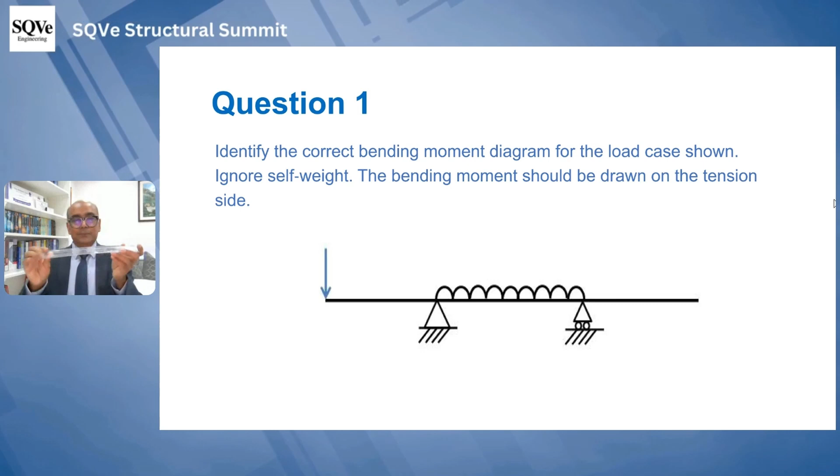I'd like to share a few quick examples on how to draw a bending moment diagram. In this question, we have to identify the bending moment diagram for this load case. Note that loading values are not given. When we draw the bending moment diagram, bending is shown on the tension side. By tension side, we mean that when it bends like this, tension is drawn here. In the UK, and I think in India too, we draw it like this. In North America, they draw a sagging bending moment like this.

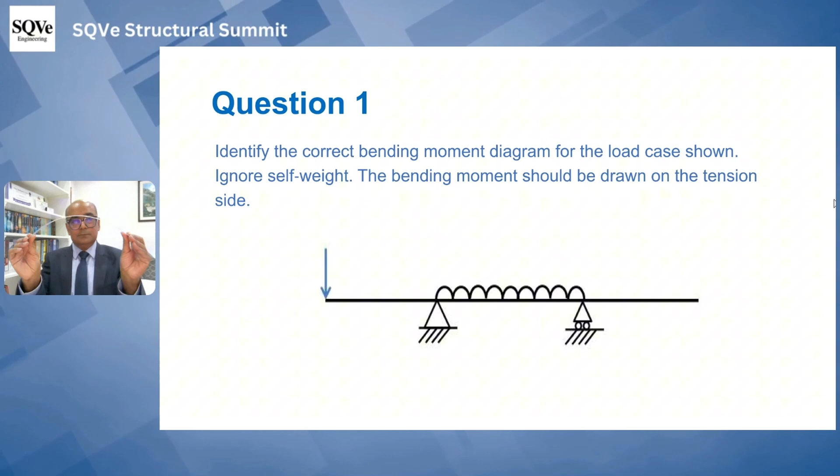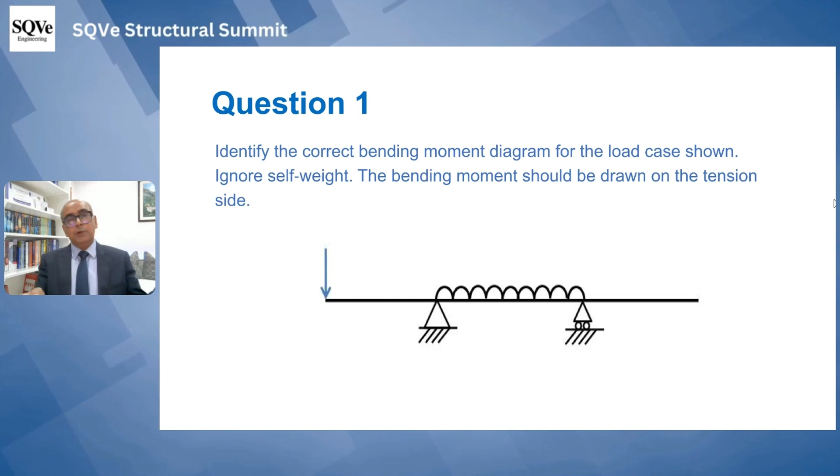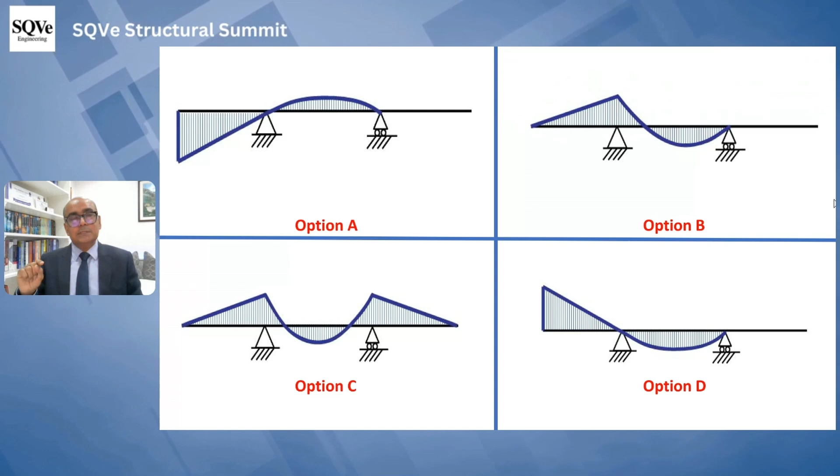Take a screenshot of this question, and I'll give you some options. See that the UDL is applied in the middle, and we have a point load at the end. It's a simply supported beam but with an overhang. There are 4 options to choose from: option A, you can see we have bending at the end, then option B, option C, and option D. What option do you think is correct? It's a very simple question.

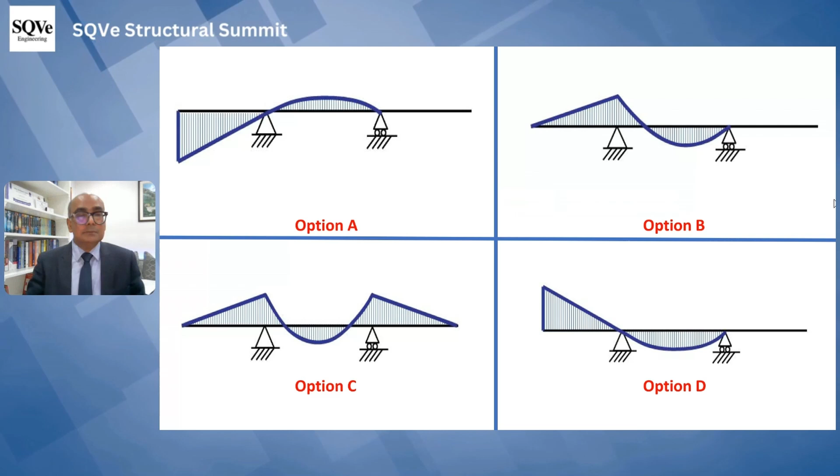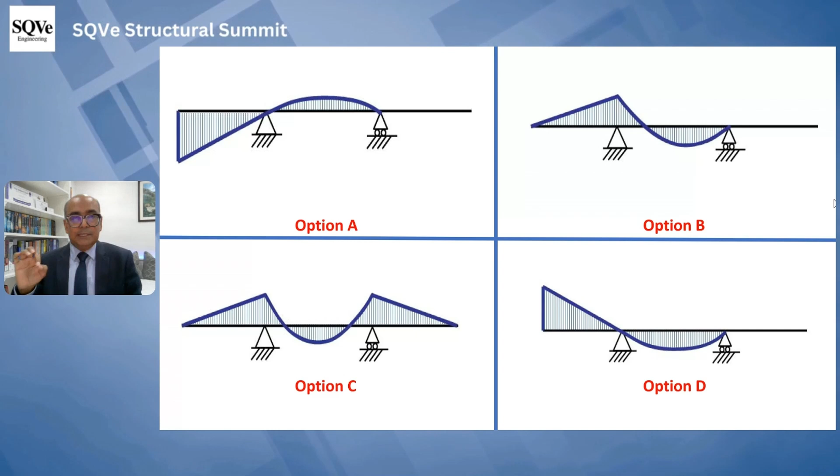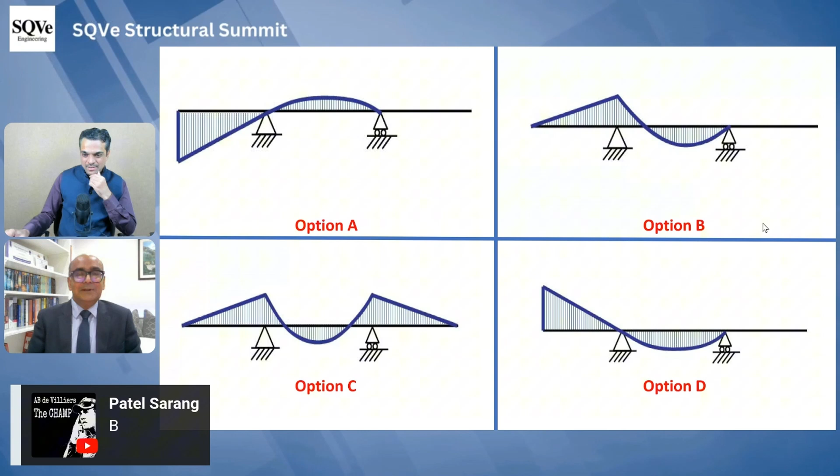I'll tell you a 3-step process to work out the bending moment diagram. So think about it, use your intuition, and tell me which option is correct: A, B, C, or D. We've started getting responses. The answer given is B by a number of participants. Excellent, it's a very simple one.

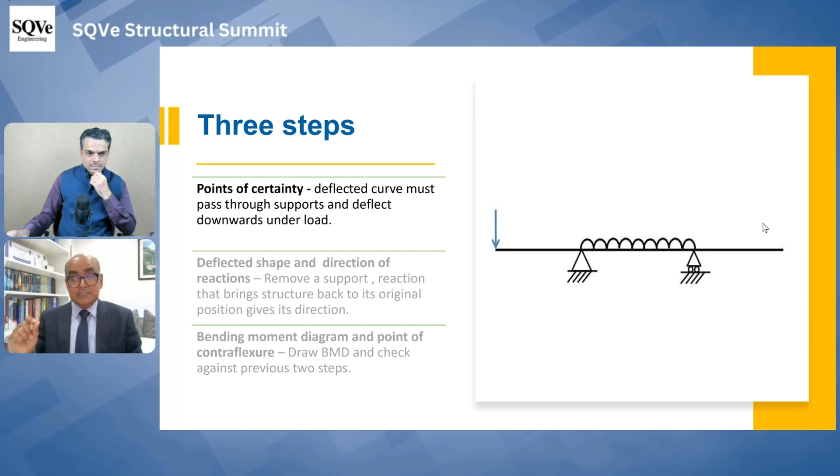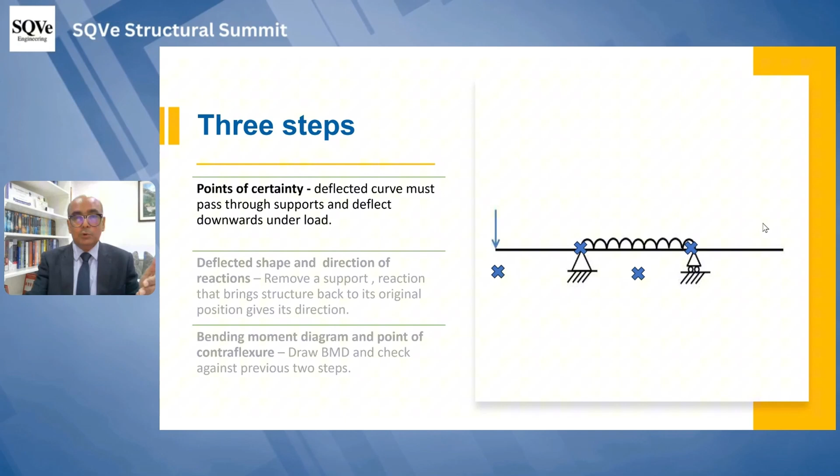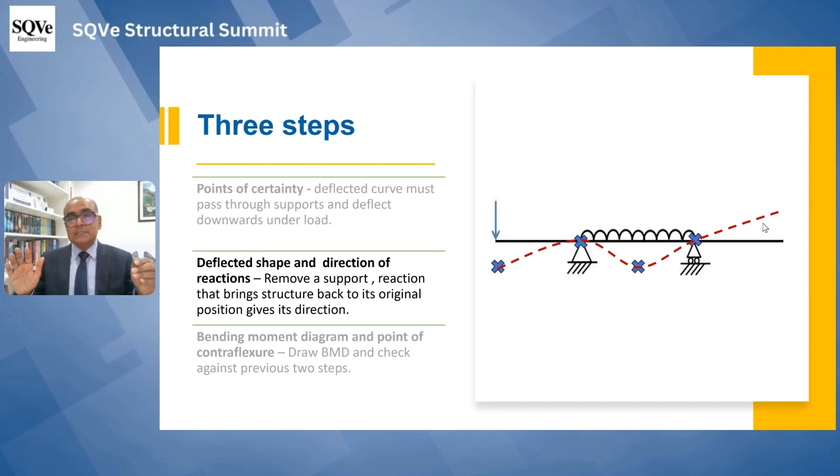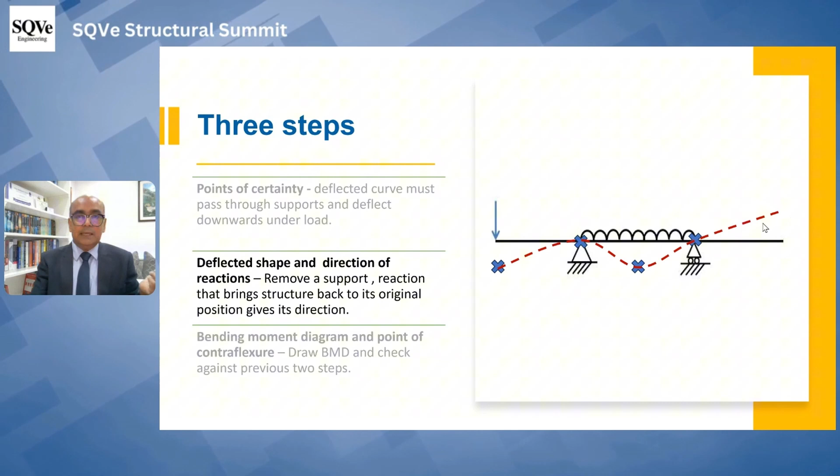Let's go through the process. First, we identify points of certainty to draw the deflected shape—points where the deflected shape will certainly pass through. Then in the second step, we draw the deflected shape passing through these points. At the right end we have a roller, so nothing is happening there, so moment should not be there. At the left side, we will certainly have moment. This deflected shape tells us a really important thing: it tells us the direction of reactions. Both reactions are upwards.

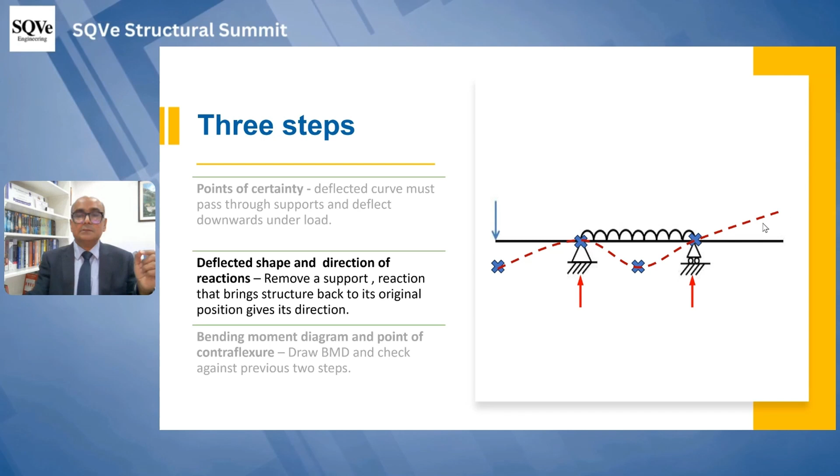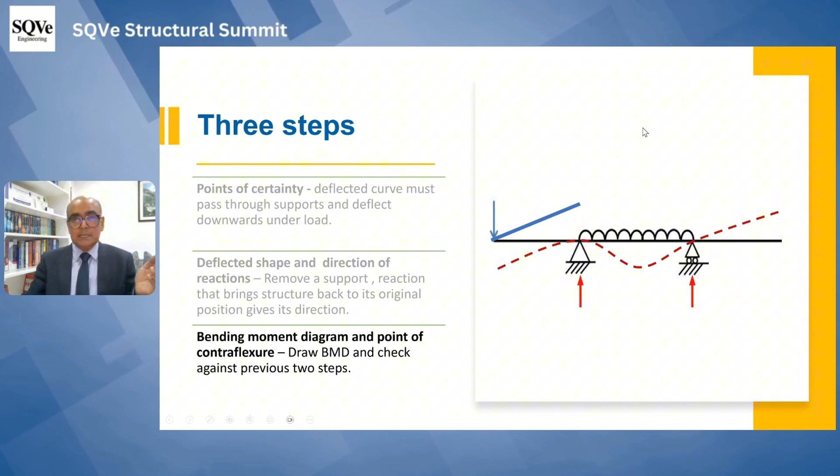And now we remove the direction. We simply plot, because direction of reaction at left support is upwards here, so the diagram should go upwards. Then we have downward UDL, and the diagram curves. Then it goes up over here.

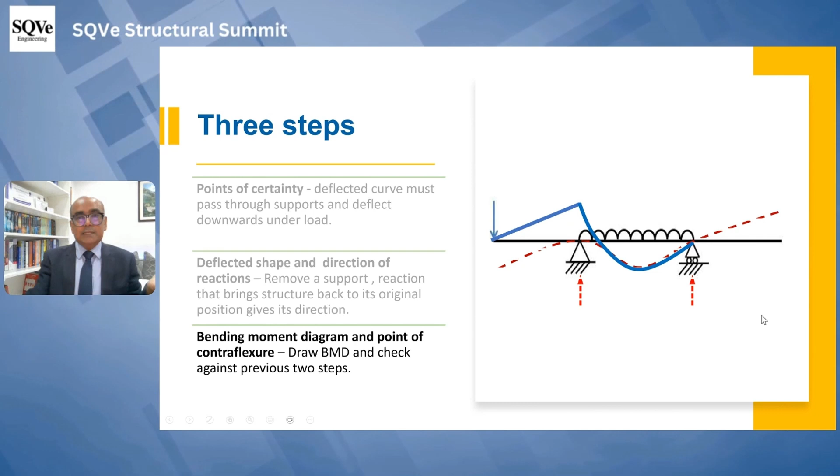So that's how everything disappears. Then you can shade it to make it really look fancy, beautiful, because we like amazing aesthetic things.

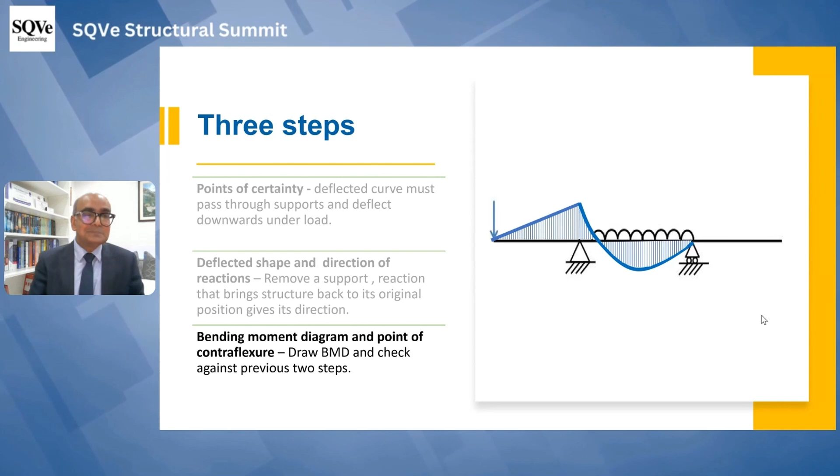And all of you got it right, so correct answer is option B. Let me move to the next one.

In this question, we have to identify the bending moment diagram for this load case, and ignore self-weight here. Self-weight is ignored. How do we draw bending moment diagram for this one?

There are 3 steps: draw deflected shape, determine direction of reactions, and that direction of reactions will tell you where the diagram is going.

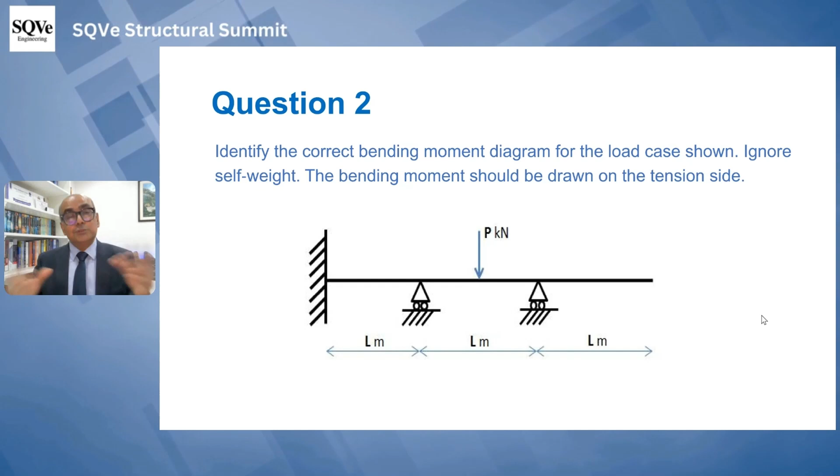Take a screenshot, and I'm going to show you a few options that will tell you which option is correct. You will tell me actually which option is correct.

Now here are the options: option A, option B, option C, option D.

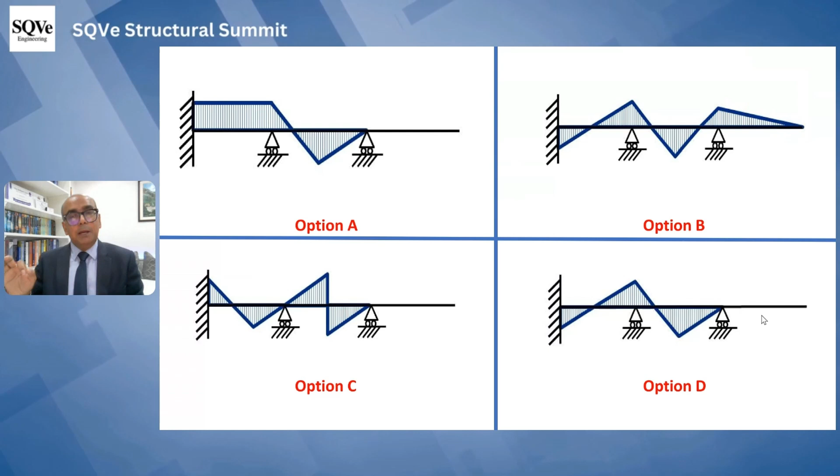Think really very carefully about direction of reactions and how you would draw its deflected shape, because there's a lot of common misconception about deflected shapes and about sagging and hogging moments. What do you think? Which option is correct?

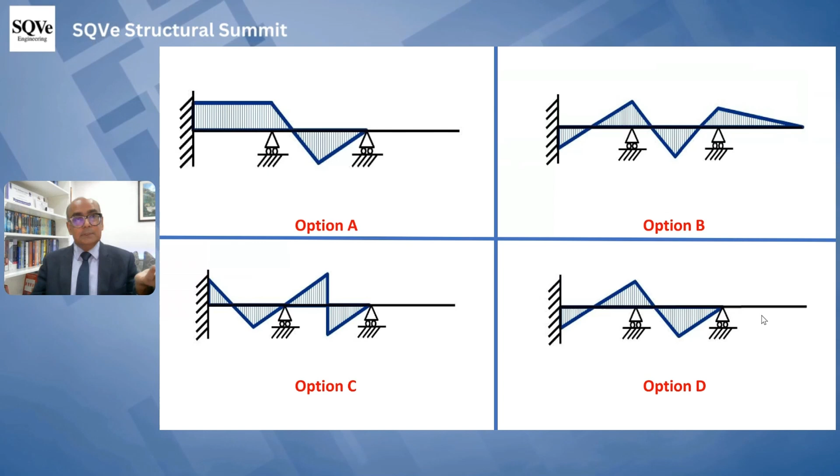A point load is applied. Is it option A, point load applied over here? Are we getting any responses?

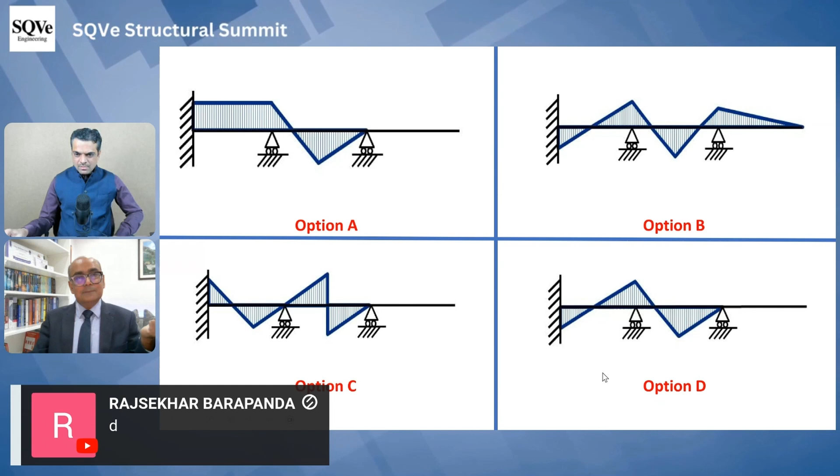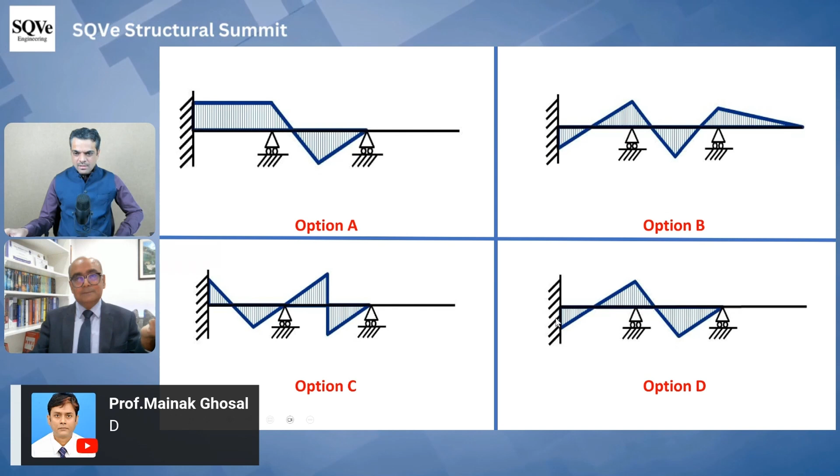Responses have started coming in. One response is option D, one is option A, another is D, another is A. Option D, option B, option D, option B. Okay, option C has also come. Option A, option C. Excellent, excellent.

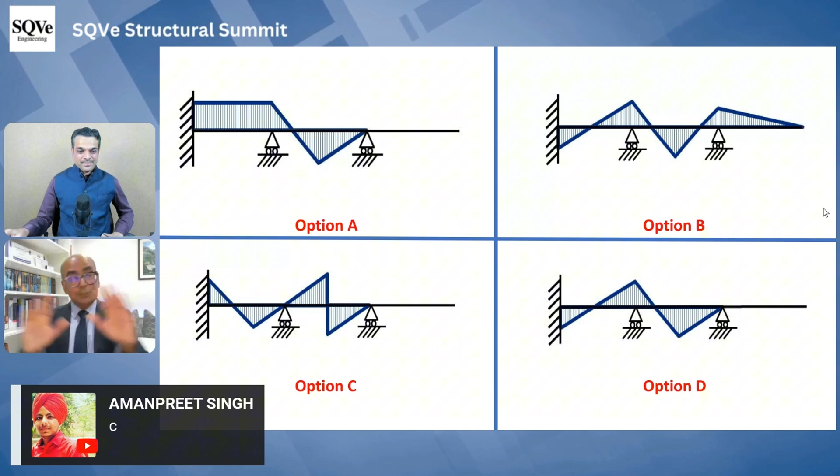So you saw that, just a simple problem. And don't worry if you get it right, or if you get it wrong. 3 months ago, I got some right and some wrong as well. So it's all right, it's not the end of the world. We learn from each other.

I have so many questions, actually I have 100 questions like this, but due to shortage of time, we will cover just 2 or 3. All right, so let's go.

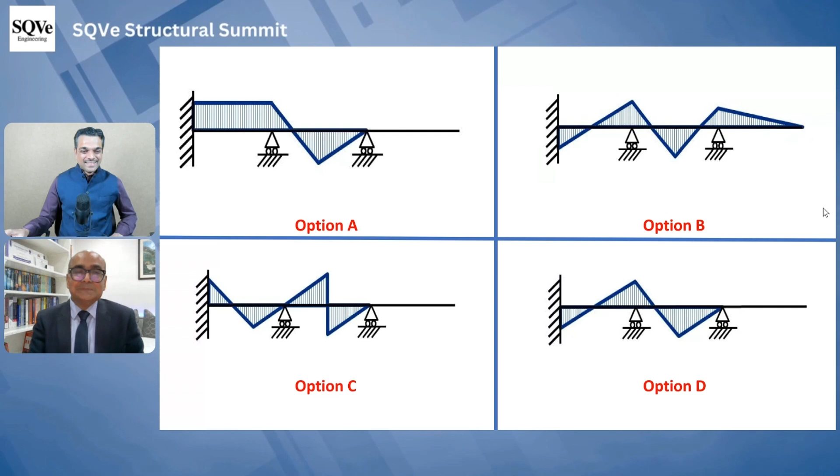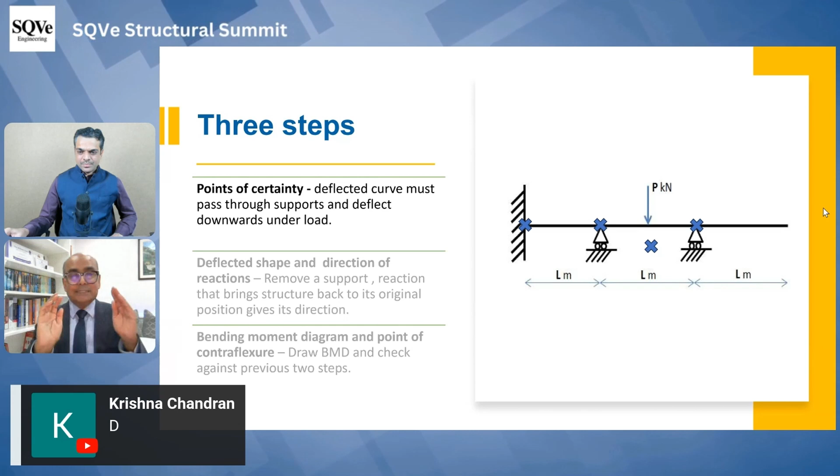So the first step is identifying points of certainty, which means that at these points the deflected shape will definitely pass. And then we draw the deflected form.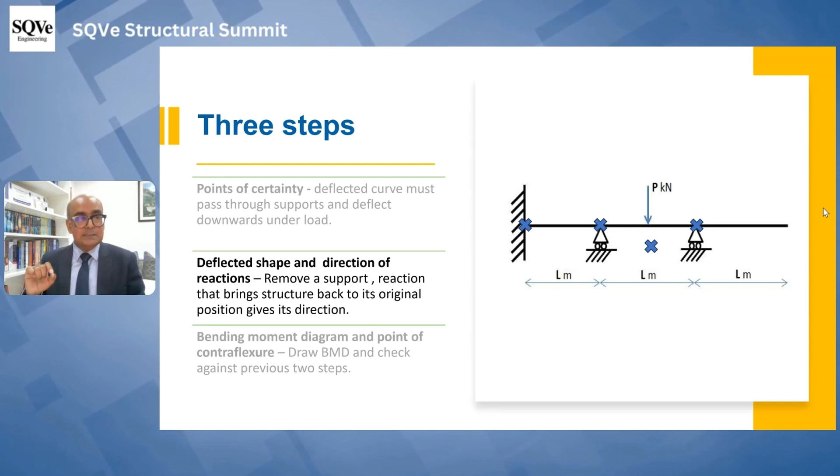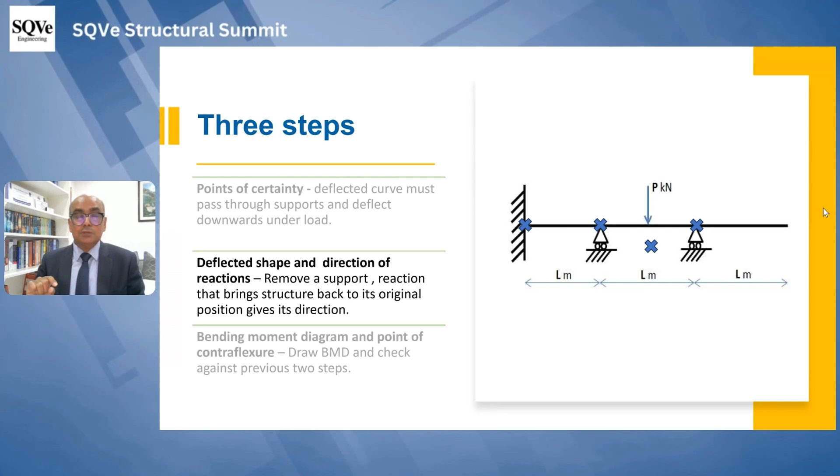Now here, if you read this left middle point, it says deflected shape and direction of reactions. It says remove a support, and the reaction that brings the structure back to its original position gives you the direction.

All right, so loading is applied at this point. So which support should I be removing? I should be removing this support.

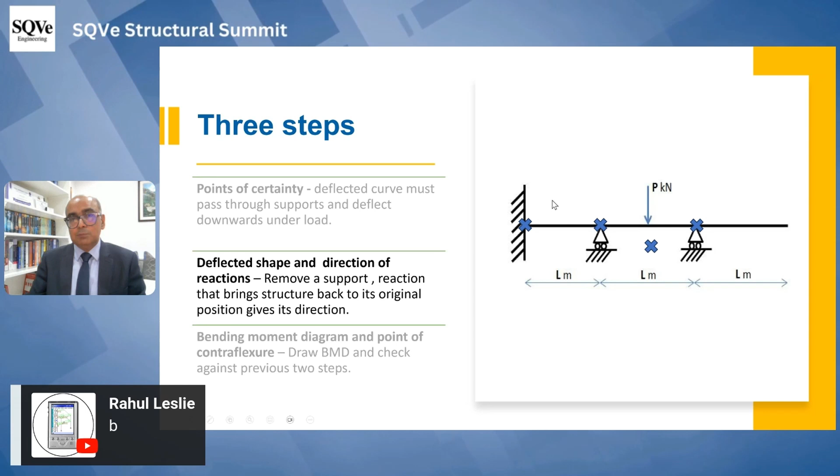So when you apply load over here, the deflected shape will probably go like this, isn't it?

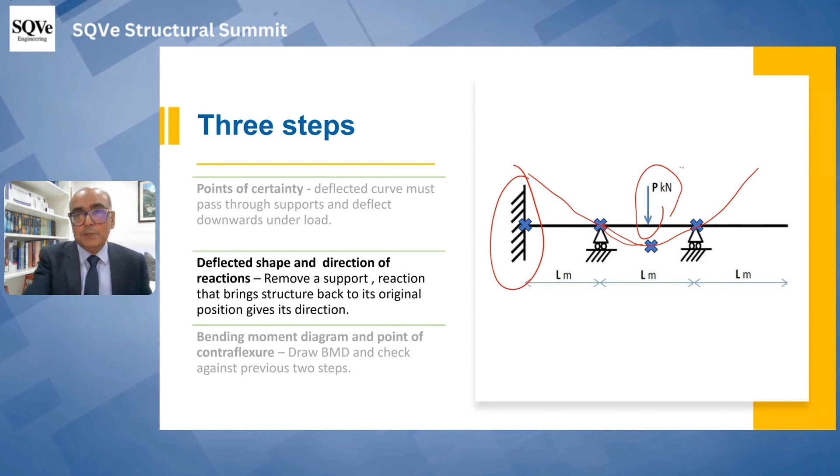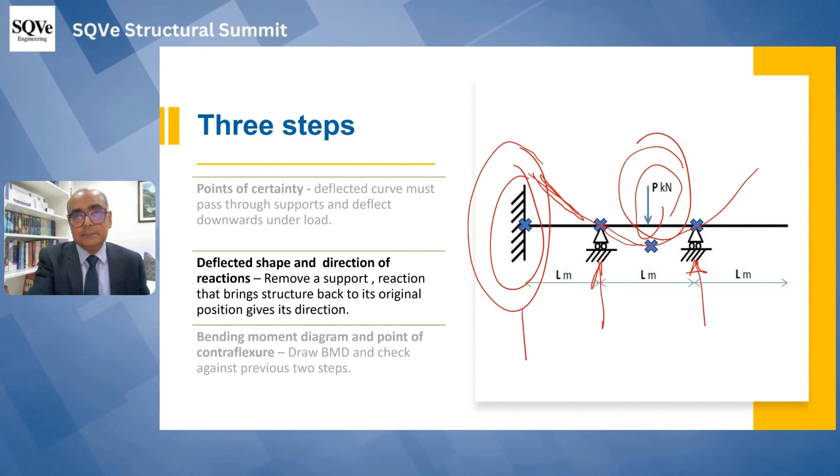If you consider this fixed support at left to be removed, what it will tell you is that because the load is applied downwards, the reaction here should be upwards. And the reaction at the fixed support, however, should be a downward reaction, because the load that will bring this deflected shape downwards will be downwards, isn't it?

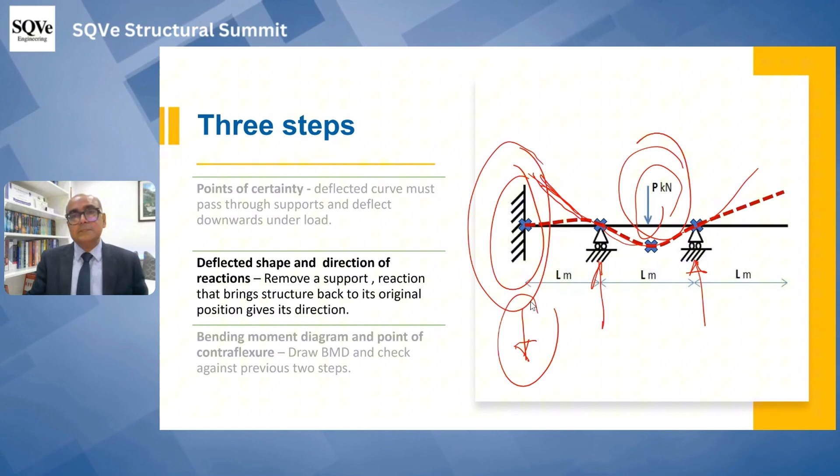So the deflected shape is like this. Reactions are up over here and down at this point.

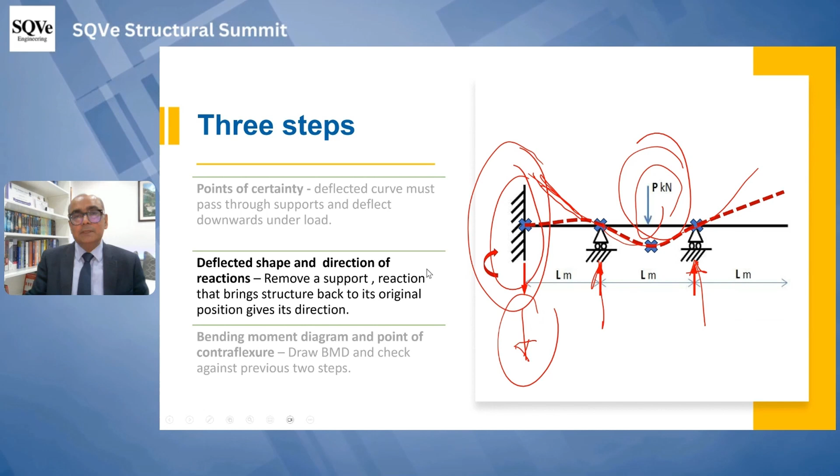And now we're ready to plot. This is the moment reaction, this is the vertical reaction. So when reactions are clear, we are in a position to draw the bending moment diagram. How do we draw it?

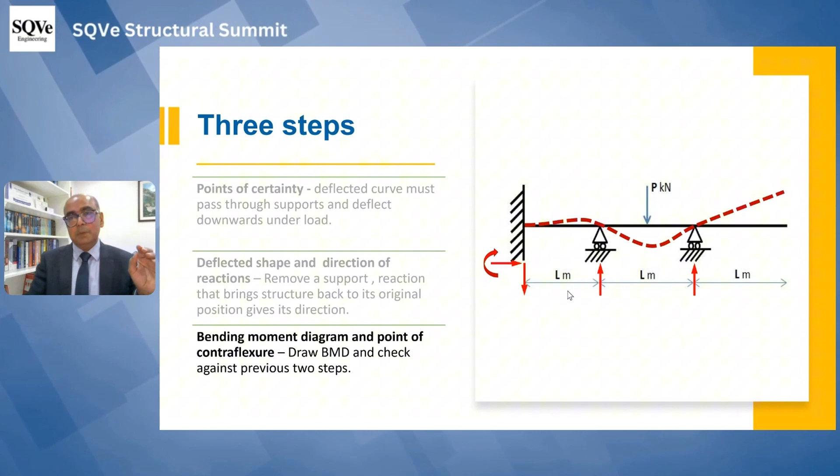We start from here, load is coming down. Beyond this point, beyond the roller, we've got nothing, so it will not be anything over here. And then, because of the upward reaction here, because of continuity, it goes up.

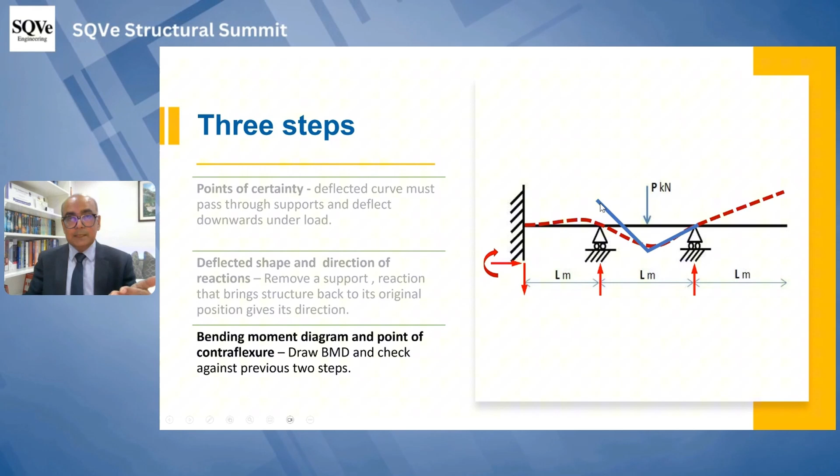And then have a look at the reaction at the fixed support. Is it up or is it down? Of course it is down, downwards. That means the diagram will go downwards as well.

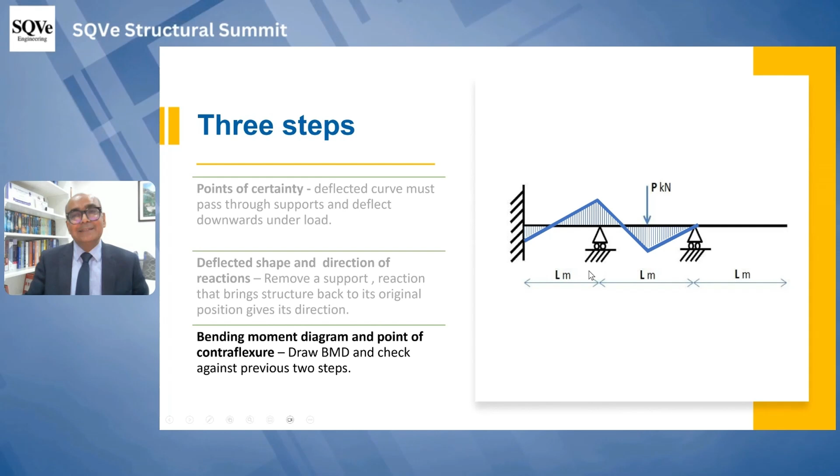Okay, then just rub off everything. Then hatch or shade this structure to make it look really amazing, beautiful, and aesthetic. And this is our answer.

So the correct option is option D.